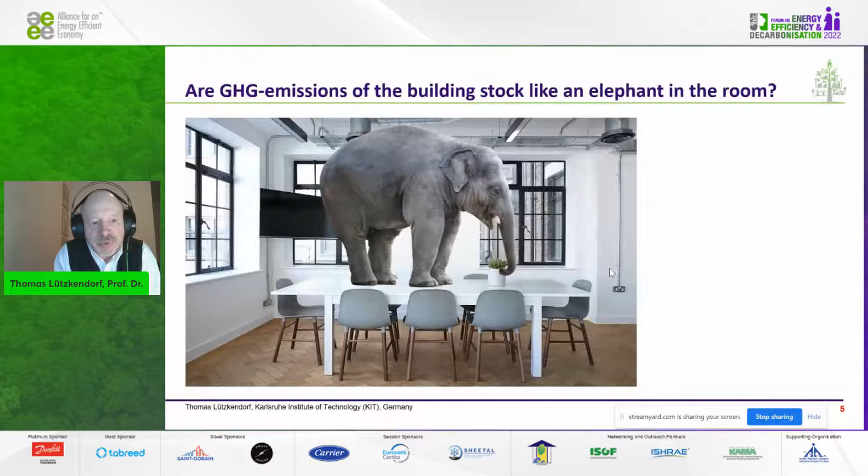By the way, there's one important question: are the greenhouse gas emissions of the building stock like an elephant in the room? It's not so clear what happens with the gray and embodied emissions. So there is a very unclear situation about the share of gray emissions.

By the way, around the world, 40% of energy-related greenhouse gas emissions can be allocated to building construction and operation, and 10% out of this can be allocated to construction product industry. In your country, in India, this figure is much higher. I have learned this from the materials I got in front of this session here, where it was mentioned something like 16%.

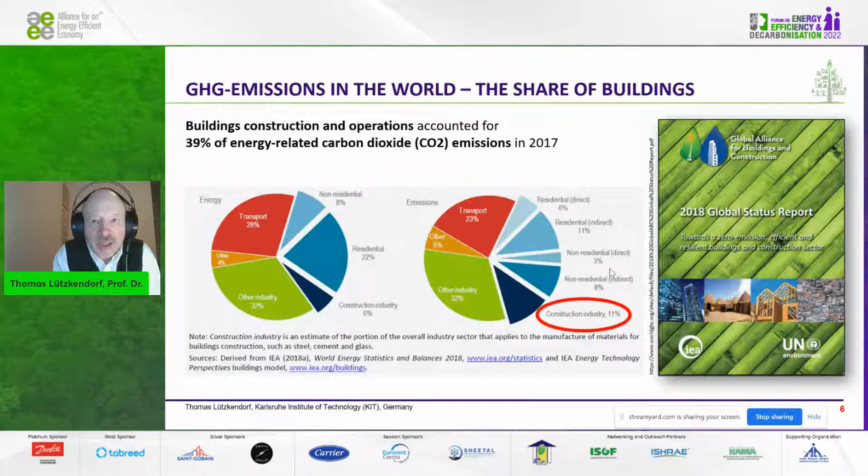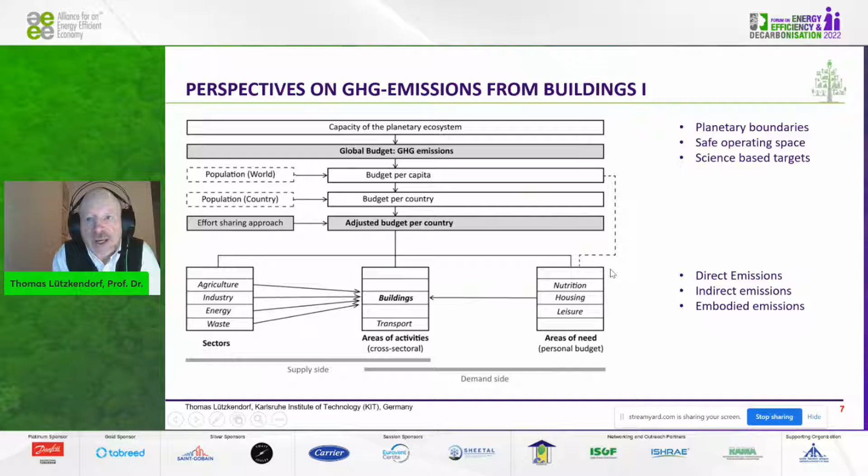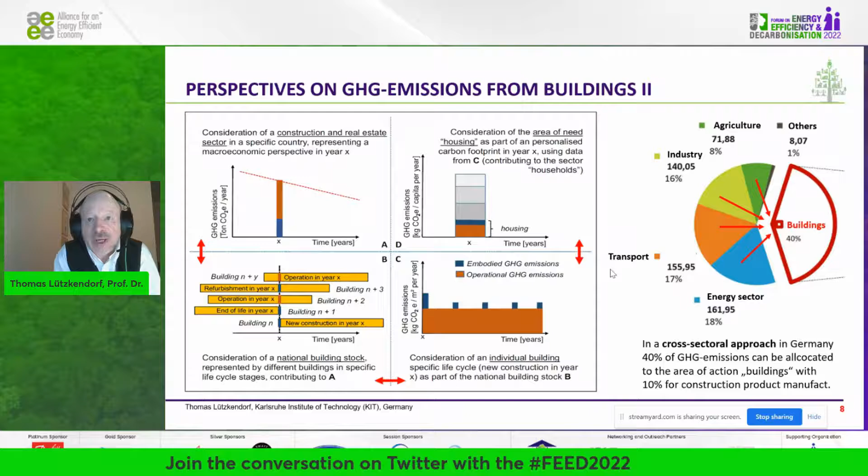Also here in Germany, around 10% are so-called embodied greenhouse gas emissions. Now we must describe the landscape: what are our objects of assessment, and what are the levels to act?

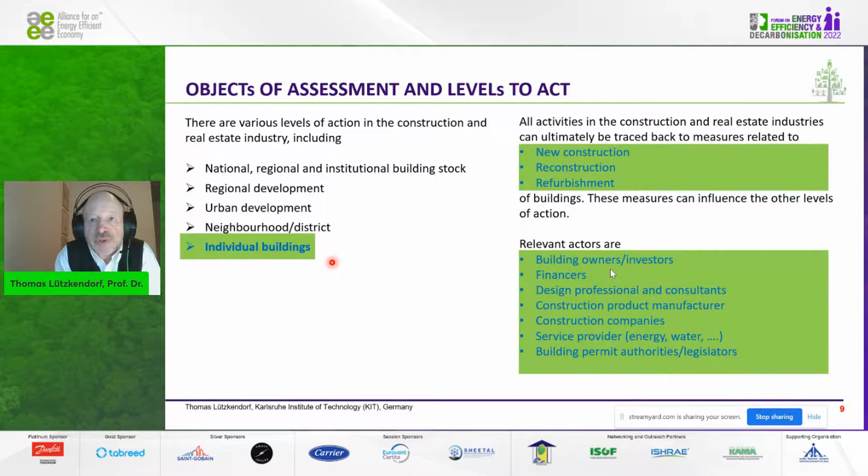We have to integrate all the actors, like the building owners, the financiers, design and professional consultants, construction product manufacturers, construction companies, service providers, and last but not least, building permit authorities. In our area of action, we have to deal with new construction, reconstruction, and refurbishment. So we can use this as a landscape, and from now we will talk about a single building.

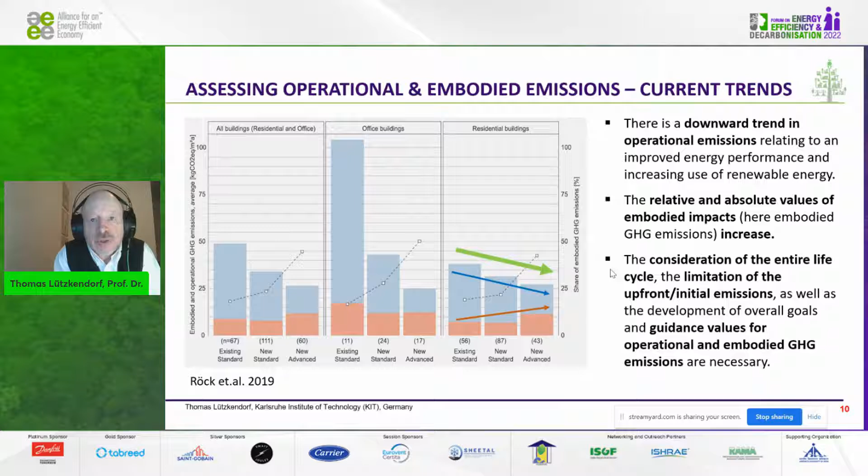In the case of a single building, based on an international survey of existing literature, you can see the increase of relative and absolute values of embodied impacts. In our days, the share is close to 50% already, and for a zero emission building in operation, it will become close to 100%. So it's not a good idea to ignore the embodied energy, the embodied emissions any longer.

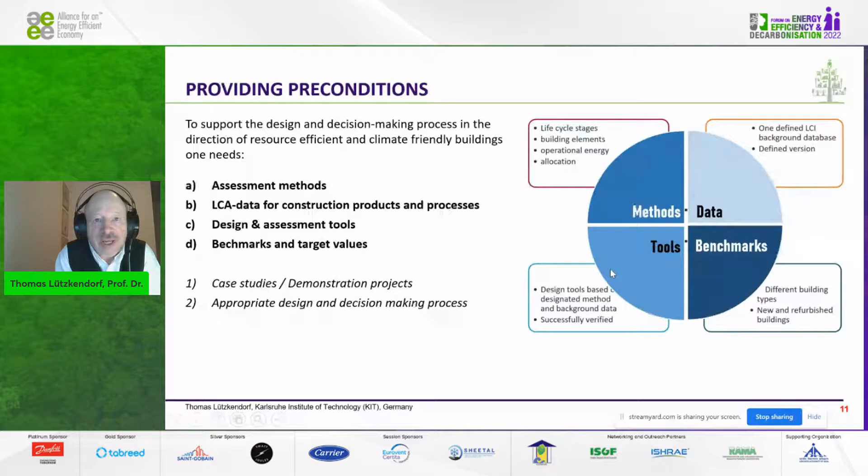By the way, there is an ongoing activity in India to create a national database in relation to life cycle impact assessment data for construction products, by one of my colleagues taking part also today. So kind regards to Sivakumar.

In the next slide, we will see how we can create a system of benchmarks and target values. For sure, we can start with legal binding limit values. From there, we can go for reference values, but more important, let's discuss short-term target values like nearly zero greenhouse gas emission and the long-term target value like net zero in the full life cycle.

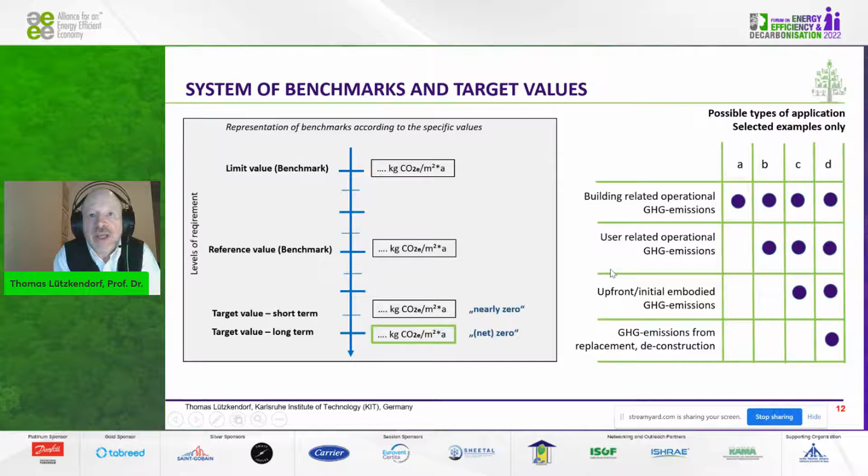On the right-hand side, you can see we have different options to create such benchmarks from the point of view of system boundary. If we take building-related operational greenhouse gas emissions, user-related operational greenhouse gas emissions, the upfront so-called initial embodied greenhouse gas emissions, and greenhouse gas emissions from replacement and deconstruction, we are able to follow the full life cycle approach. This means column D. We have to go for column D to create a system of benchmarks and target values.

So let me summarize with some recommendations for policymakers. In any case, we need legal requirements to limit the use of energy, but especially the greenhouse gas emissions in the life cycle of buildings by 2025 or before.

I recommend you follow a top-down approach from planetary boundaries. But from my point of view, the limitation of greenhouse gas emissions is not enough. This should become part of an overall approach to protect the environment and to save resources.

And now, public power authorities, I like to invite you to become a front runner. You can use the strategy of green public procurement or sustainable public procurement to show good examples.

And at the very end, each company, but also each public authority, is invited to come out with a sustainability report to show the progress in limiting the greenhouse gas emissions of the building stock, the institutional building stock, the national building stock, and also in the life cycle of a single building.

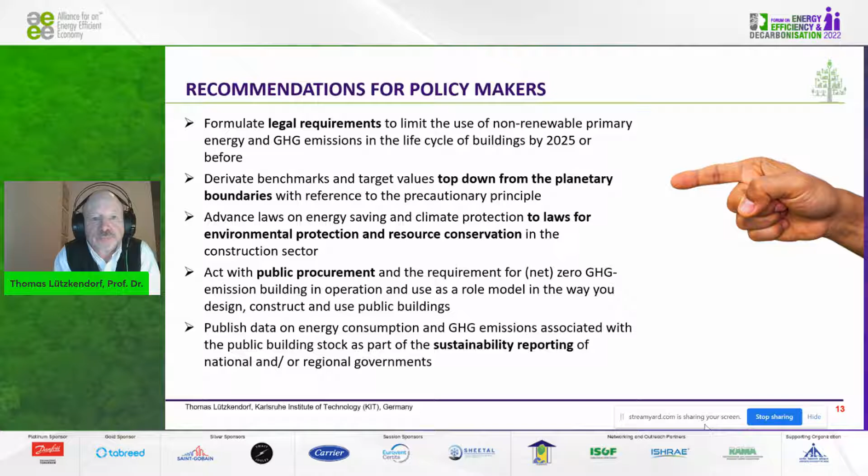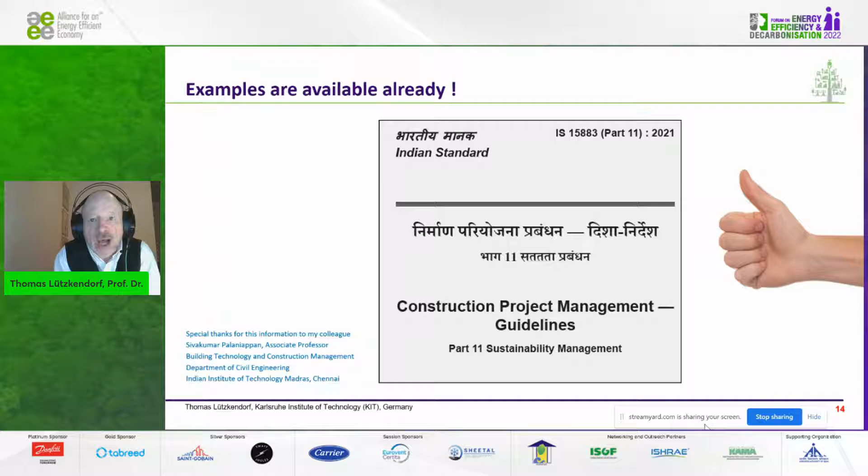By the way, examples are already available. If you go to some of your national standards, you can see sustainability management has already become a very important topic, also in India. And again, thanks to my colleague.

So I wish us certain progress. Let's make the carbon footprint of buildings, in our case the elephant, smaller. And in this way, I wish you a lot of luck and a lot of success. And I hand back to the moderator. Thank you.

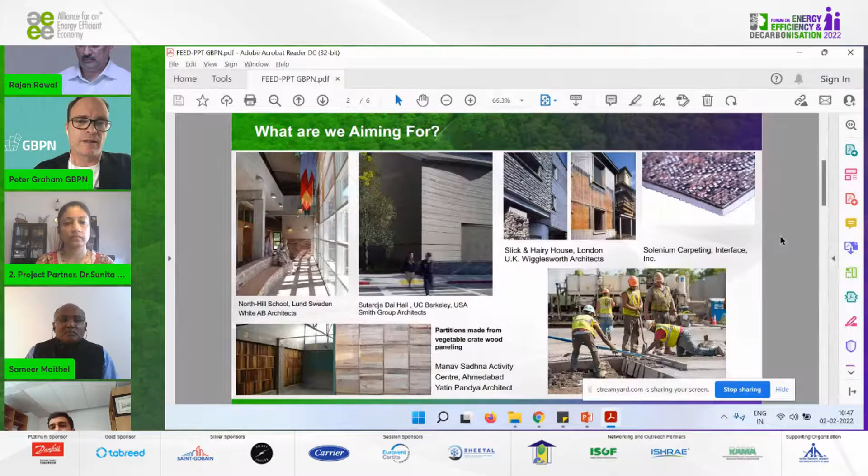There is a lot of momentum heading in the direction of increasing emissions rather than decarbonisation. The magnitude of this challenge has been set out by the Marrakesh Partnership for Global Climate Action, reinforced through the Buildings Pavilion at COP. We have to halve building sector emissions by 2030 to be on track for a less than 1.5 degree global warming target under the Paris Agreement. So there's a lot to do.

On the embodied carbon side, we can see at least 40% needs to be reduced by 2030, and 50% on leading projects. So that is a big challenge. And we're dealing with an industry optimized to maintain the status quo. So we need to be thinking about policy measures which aren't just good in theory, but can actually be implemented through policy transformation and reform strategies.

The way we like to think about it with the work at GBPN is about integrated policy strategies, looking across the whole building life cycle. I'm going to elaborate on some of these, but just to show that even though this is a massive challenge, we really do have some clear sight on policies which work. So this is the good news.

Very fundamentally, we need to have a clear perspective of the goal. And what's encouraging when we see what's happening in India at the moment is that setting a zero emissions target is driving a series of new initiatives to transform the economy towards zero. But without the target, without the ambition for zero, we don't see any of this transformative change.

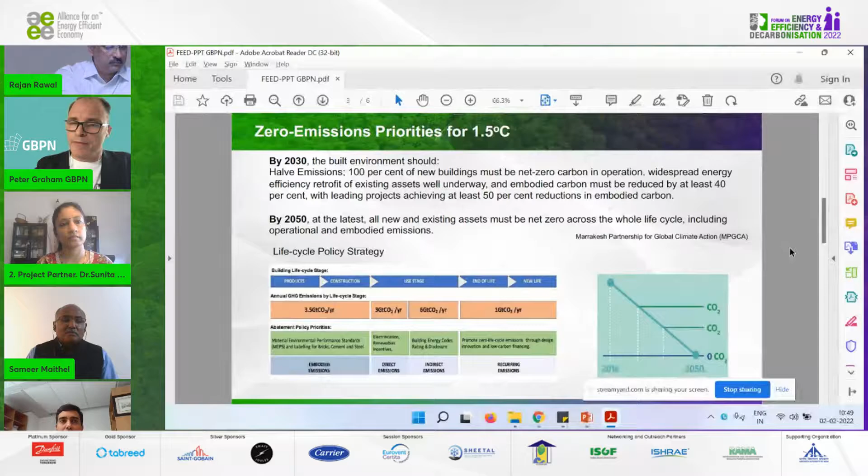Many countries are making commitments and developing policy strategies now. So we can see, just do a quick tour of the world: China has established this 1+N emissions peaking strategy, for which the building sector plays a really important role. Decarbonising the building sector is one of the key measures in the 1+N peaking strategy.

Again, you can see a number of things which are going to influence the whole value chain and construction market, from setting a carbon market incorporating the building sector, through to a focus on reducing emissions from new construction by 90% by 2050.

We were involved in supporting some of the work of Vietnam and Cambodia in developing their NDC roadmaps. Both countries have identified dealing with embodied emissions as well as energy efficiency in buildings as key components of achieving their NDC commitments. So there's a real awareness now of just how important tackling the whole life cycle of emissions in buildings is.

The European Commission has just recently, back in December, released a proposed recast of the Energy Performance of Buildings Directive, where they shift the goalposts from near zero energy to zero emissions buildings. This is really shifting to that life cycle view.

This is just part of one of the goals from the proposed amendments to the EPBD: that as of 2027, whole of life cycle global warming potential of new buildings with a floor area greater than 2,000 square metres needs to be calculated and disclosed, with a requirement for all buildings from 2030. If that were passed, that would really be a transformative signal to the market.

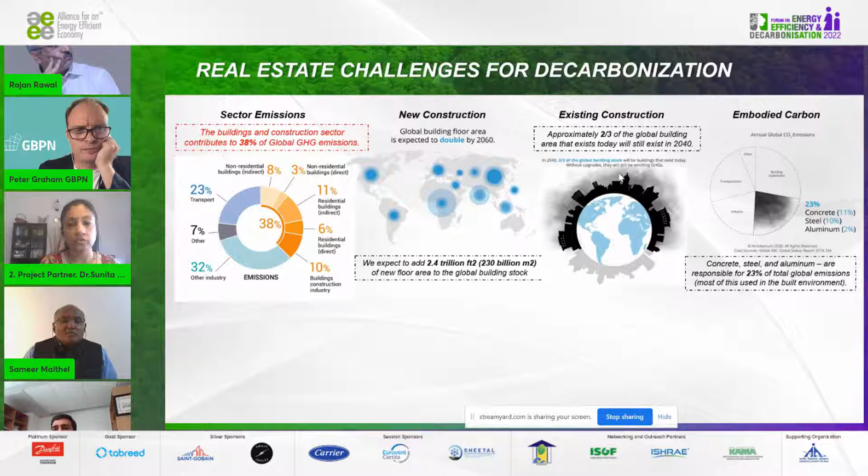The challenges are, do we have that infrastructure currently in place? And what are the steps that each one of us should be taking?

Along with all of that, we have to look at the embodied carbon in building materials, which is a major concern, the elephant in the room. Materials like concrete, steel, aluminum, widely used in this sector, are the major contributors to embodied carbon emissions.

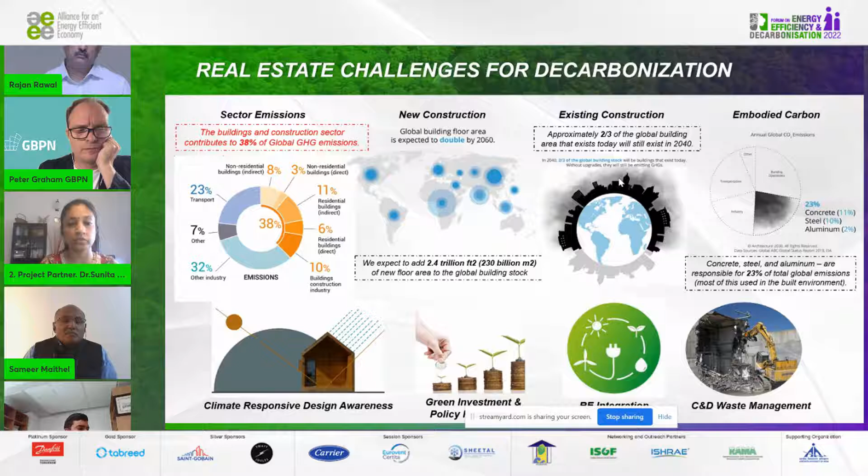The widespread use of RCC in buildings is also leading to thermal discomfort, which leads to increased use of air conditioning and adding to energy usage and emissions. Therefore, should we look at reviving some of the traditional ways of making buildings and staying thermally comfortable?

Historically, Indians and Indian buildings have not used air conditioning in spite of this being a hot tropical country. Climate responsive, region specific architecture revival in design can contribute to a significant reduction in building energy consumption as well as embodied carbon through use of local materials.

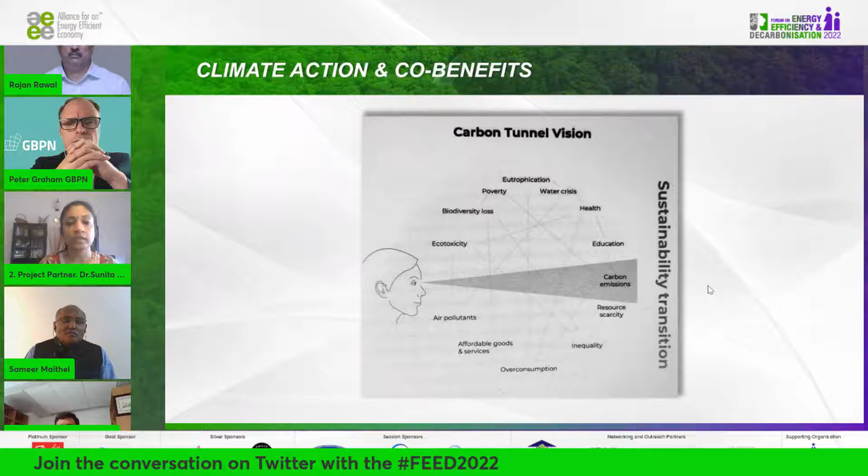However, we are still witnessing a gap in the climate responsive design knowledge and its implementation. While these measures have been well described in green building codes and standards like ECBC and Eco Niwas Samhita, these standards are not yet mandatory and have not percolated into the local building bylaws.

Additionally, policy incentives on adoption of low carbon materials, GST benefits on alternative low carbon materials, that is an evolving area. And while we have the target to achieve net zero through renewable energy, uniform grid renewable policy procurement across the states is still a challenge.

Additionally, on-site renewable is a huge challenge, especially when it comes to rooftop area, space constraints, and other services that need to go onto rooftops. So looking at a mix of small wind, possibly biogas, and on-site solar, and building integrated PVs could also be some of the solutions we can look at.

But all of these increase the capex significantly. Overcoming that is therefore a challenge for most developers.

Buildings have a life cycle impact on environment from construction to occupancy to demolition. The construction and demolition waste has to be brought up in context of decarbonization, because currently, while we have the C&D regulation rule in place, the processing in India of C&D waste is only up to 1%. The rest ends up in landfill or on land and water resources, leading to other issues such as flooding.

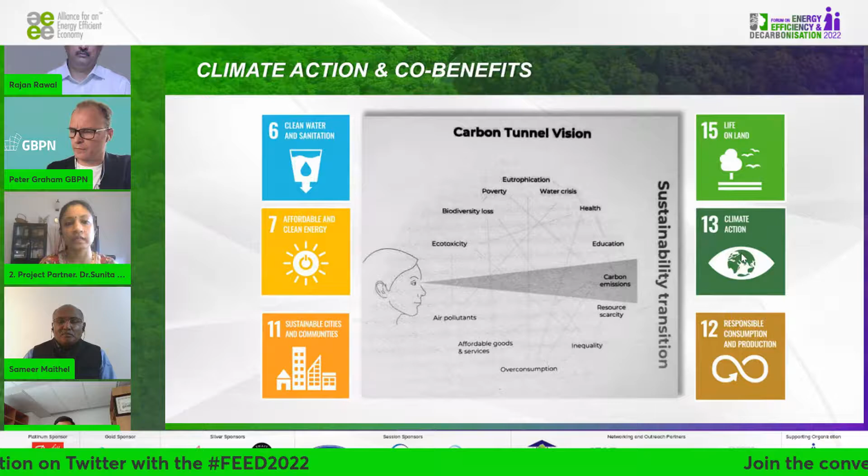Climate action linkages, responsible consumption and production, these are definitely other SDGs that will get positively impacted through energy efficiency, through demand reduction mechanisms, through renewable energy integration, leading to sustainable cities and communities, while we look for affordable and clean energy.

It's symbolic that this SDG actually has a sun and a button, because we forget the sun and we look only at the button when it comes to getting energy within our homes. The sun is a source of energy. It's also about how you design your home, and therefore climate responsive design can enable you to get good sun into your home while keeping away the heat during the long afternoon hours.

Clean air and clean water and sanitation is deeply linked, and the resource conservation around water is deeply linked to decarbonization. And you will wonder how. Because getting clean water into your homes is a result of a lot of pumping that happens, getting it from a source which is far, far away into your homes.

What if you were to design homes which are water resilient, have a source of water, reuse all of the water, and also ensure water conservation? That is definitely something that needs to be thought through. And therefore, one must look at moving away from the carbon tunnel vision.

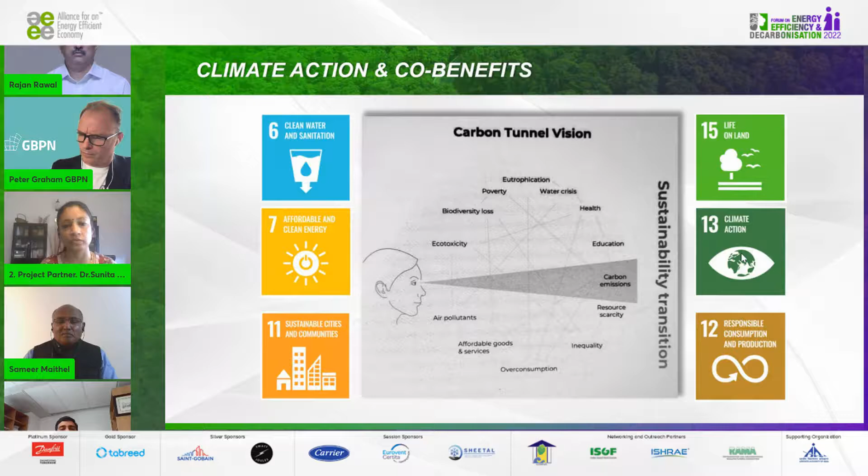This photograph is out there on LinkedIn, and everybody is using that. But I must talk about the Panchamrit. One of the things the Prime Minister has mentioned is about conscious consumption, that each one of us is part of reducing the demand, then moving over to energy efficiency, and then going to renewable energy. These are the two main things I wanted to discuss today. Thank you.

I would like to give a few examples from India and take this discussion forward. As we have heard, the whole life carbon of buildings consists of many components: upfront carbon, which is the carbon associated with raw material mining, its transportation to the manufacturing site, the manufacturing of materials, then transportation to the building construction site, and the construction and installation. That is what we call upfront carbon.

Similarly, we have the use stage embodied carbon, related with maintenance, repair, replacement, and refurbishment. And a very large component is the operational carbon, related with operational energy use. These two combined together, we call phase two, or use stage carbon.

And then we have the end of life carbon, which is related with the deconstruction, demolition, its transportation to the waste processing factories or sites, and then waste processing and disposal. So essentially, the whole life carbon consists of all these components, and we can express this in terms of kilogram of CO2 equivalent per meter square of the area of the building.

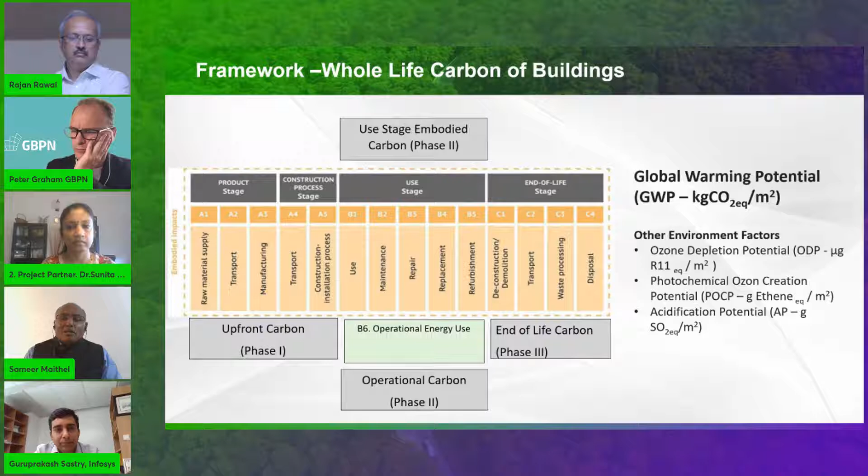Now, the two examples which I am going to present: the first one is the whole life carbon assessment of a net zero energy building at CARBSE, CEPT University. This is work done under a master's thesis by Milli Jain under the guidance of Rajan, and they have tried to calculate the whole life carbon for this particular building, which is a very well-known net zero energy building in India.

If you look at the upfront embodied carbon for this building, which I explained in the previous slide as phase one carbon, what one can see is that there is a very high contribution of cement, steel, as well as solar photovoltaic panels. So we have to be mindful that solar photovoltaic panels, which we are using for net zero energy buildings, are also contributing to the upfront embodied carbon.

When they calculated the entire whole life carbon for this building, the net carbon impact came to almost 2,600 tons of carbon dioxide equivalent over a 60 year lifetime of the building. So there is a net carbon impact, and what we also have to see is that the lifetime of the building is an important parameter when we calculate this whole life carbon for a building.

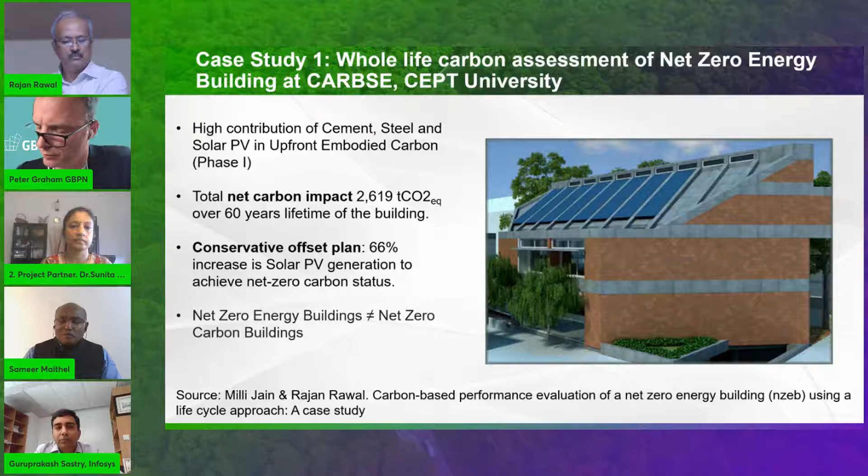This is not the entire whole life carbon assessment, but we are only looking at the upfront embodied carbon, which, as we have seen, is a very significant part of the whole life carbon assessment. In this case, we considered 5 cases. Case 1 is the concrete frame construction with ordinary solid bricks, which is the most common or baseline construction in India. Going forward in terms of resource efficiency, case 5 is the most resource efficient: vertically cored hollow block confined masonry with waffle slab.

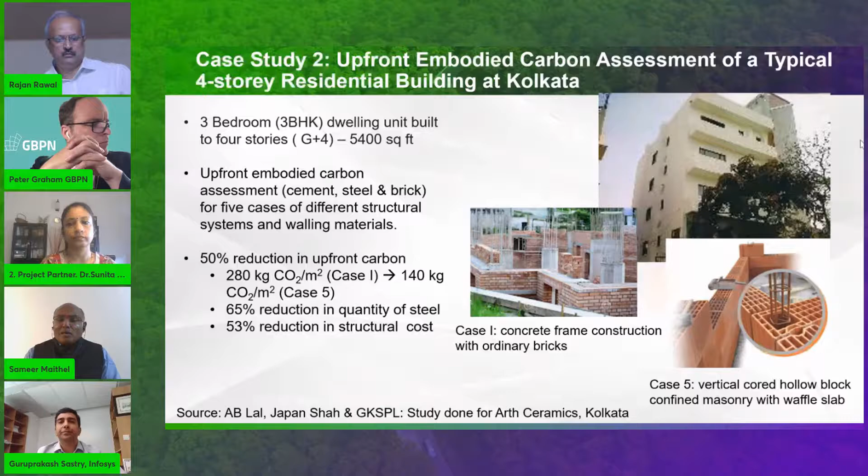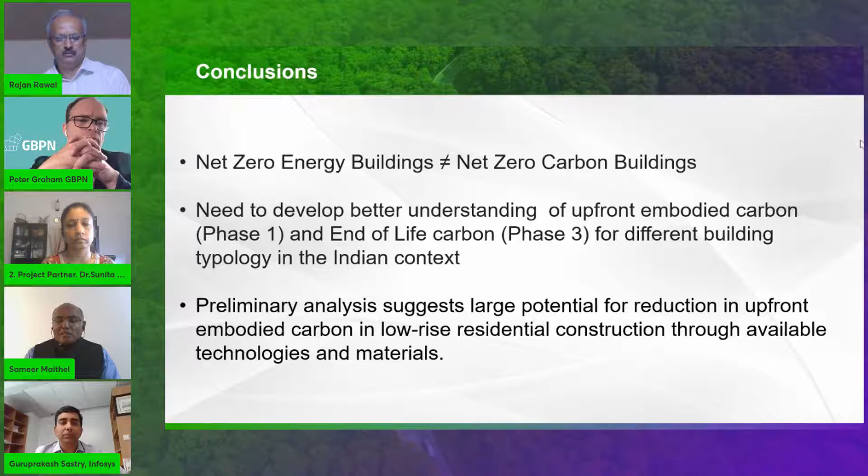So here we can see that there could be a win-win case here where for certain types of building typologies, we can have alternate systems which help us reduce carbon and are also economically cheaper. So just to conclude: net zero energy building doesn't necessarily mean net zero carbon building. In the Indian context, we have to develop better understanding of phase 1 and phase 3 for different typologies of buildings. Preliminary analysis suggests that we may have solutions which can help us reduce upfront embodied carbon, and which may also be win-win solutions. Thank you.

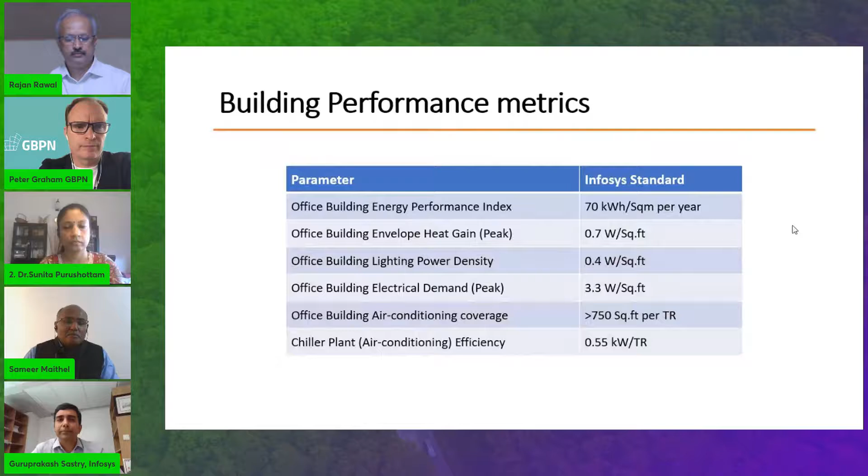Yeah, Guru. So when you look at the performance metrics for buildings, the problem we have today is that when you are looking for an efficient building, you don't know what to specify. That's the common problem everybody faces. In fact, even when we look at renting space in some parts of the city, when we talk about any performance metrics, nobody has a clue. The owner, the builder, usually doesn't have a clue.

And look at the standards that we follow - these are typically about one third of what the building industry follows, or specifically what commercial buildings follow. So there is a huge scope for improvement here. Unless we have clear, simple metrics for buildings defined, it's very difficult for people to understand and select wisely in terms of low energy buildings or high performance buildings.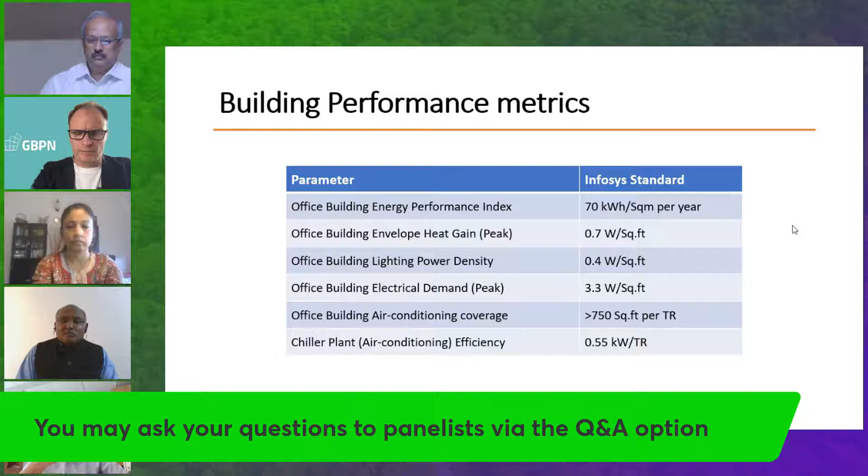That's the first point. The second point, which is also very important from the design aspect - look at some of the electrical demand numbers. We have 3.3 watts a square foot, that's the peak demand including everything in our building, that's what we design for. A typical builder is at 7 to 10 watts a square foot, which means every single piece of equipment in the building is oversized by 2.5 to 3 times. So when you know it's going to be an office building, why design 2 to 3 times oversized?

So this is a complete national waste. You are spending extra on equipment, you are actually buying equipment which is not required. So that's a very important thing. The second important point is the use of technology.

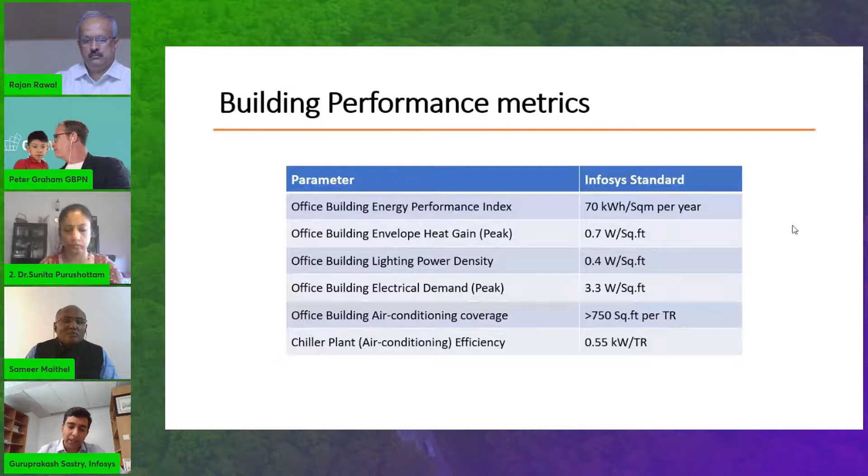Today we do have a lot of tools available which can help you optimize the building design, so that you know what kind of building energy performance you will have, and how to size your equipment in the building appropriately. This is something available today which not many people have made part of their design or operations process. But if you see, at least in India, across different sectors - when you look at the industrial sector, industrial automation is far more advanced. And when you look at automobiles, there is a huge advancement that has happened.

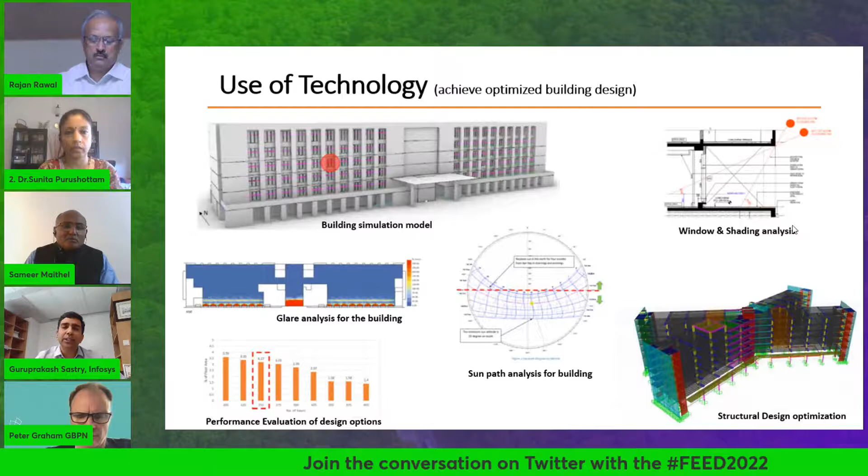Unfortunately, in the building and construction sector, the advancement is very minuscule in the last two decades. How many people are using a good simulation model to optimize the structural design, and the amount of steel and glass used in the building? Very few do that. People still go by convenience and ease of getting things in the market, rather than the holistic view of a building's life cycle.

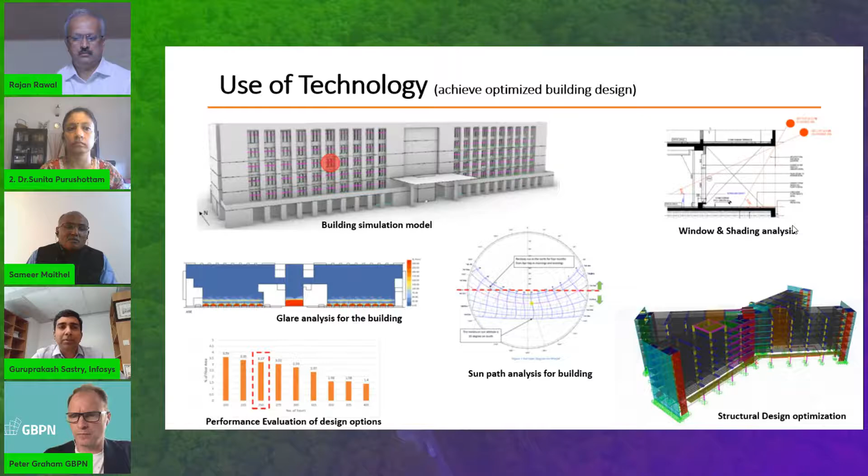So this becomes very important: use of technology, use of the right tools, not only in design but also in operations. These are some examples of what we have done in terms of operations, because it's not enough to just design the building on a high performance metric. It's very essential to maintain the performance over a long period.

Buildings are typically designed for at least 20 to 25 years. So how do you ensure they are running as efficiently as day one? This is only possible through continuous monitoring with reliable sensors, reliable energy meters, and so on. This is what we have done across Infosys, and we feel it's very important because it has saved us a lot of operational energy over the last decade, and also helped identify opportunities for savings in our existing buildings.

We've been able to reduce some 35 megawatts of connected load. We've surrendered a large part of our contract demand with the discoms in many of our locations. This is only possible because we know what we are consuming and where we are consuming it. You can only manage what you can measure. That's definitely what we believe.

Today there are enough building automation systems available, and if you know what to specify, what to monitor, and define clear metrics, then you can really utilize automation systems in a very effective way. Today a lot of automation companies, I'm sorry to say, are just interested in showing you some screens where you can switch things on or off remotely. But that's not really the ultimate purpose of a building automation system. They can be used to manage your overall operations in a much better way.

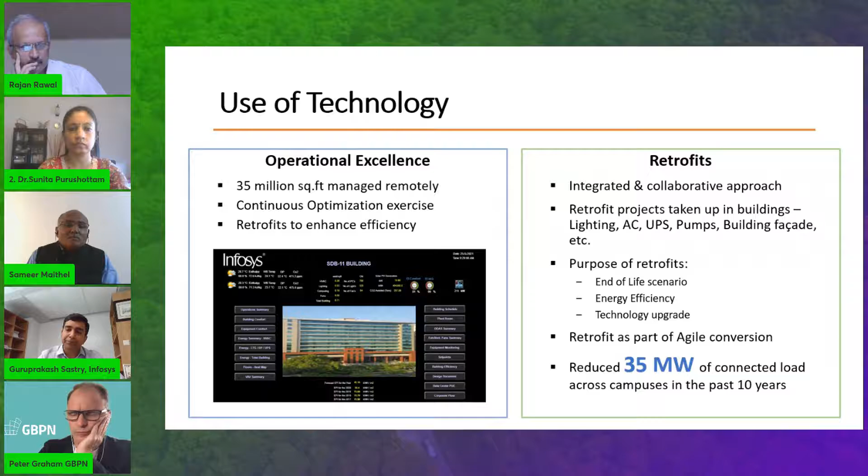The third point I would like to make is how this aligns with ESG goals. Today you hear a lot of companies taking up ESG goals. Even we published our ESG commitment a year and a half ago, that we would continue to be carbon neutral across all emissions until 2030. But one thing we have to be very careful about when we define this ESG vision, specifically on the environment...

It's very easy to jump to renewable energy or carbon offsets, which is an easy path to offset all your emissions, because today a lot of people are talking about emissions. So there are easy paths available to achieve zero emissions. But the first and foremost important step when it comes to net zero emissions is energy efficiency.

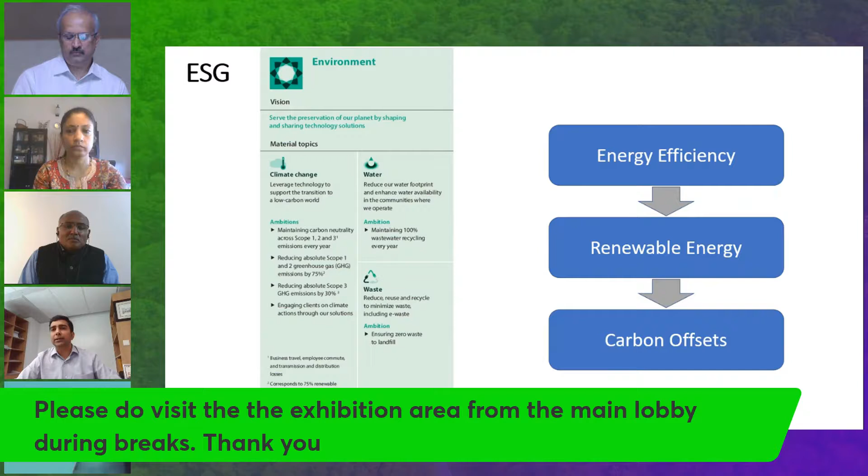Drive down your demand, drive down your consumption in operations and energy, and then invest in renewable energy. Whatever emissions remain after that are what need to be offset. So these are the steps to be followed, and this needs to be made more publicly aware.

A lot of companies today, especially IT companies, have taken up very aggressive ESG goals globally. I feel if we don't follow this approach of giving energy efficiency the first and top priority, then the whole point is somewhat lost. We are still having a lot of energy consumption and emissions, but we are offsetting. And if we depend on renewable energy, we are adding unnecessary capacity on renewable energy plants.

Guru, can I request you to conclude in 30 seconds from now?

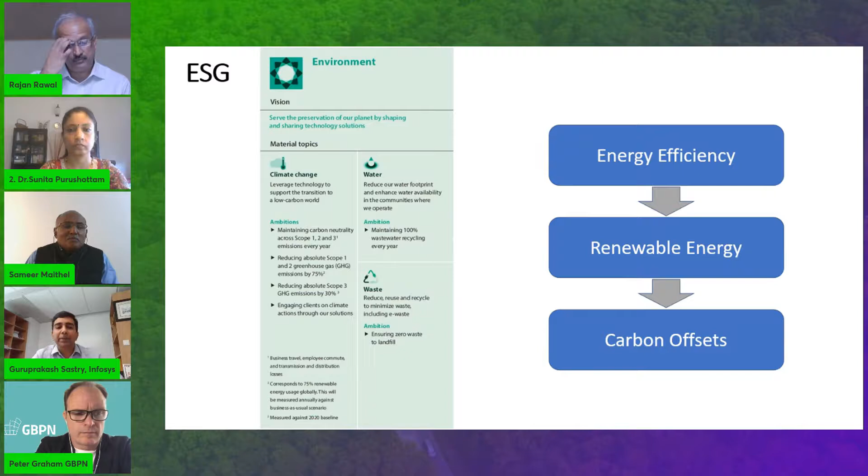Yeah, this is all what I wanted to say. So this is the third point. I feel there is a lot of opportunity, and I look forward to working with all experts like you guys to make this happen at a policy level and so on.